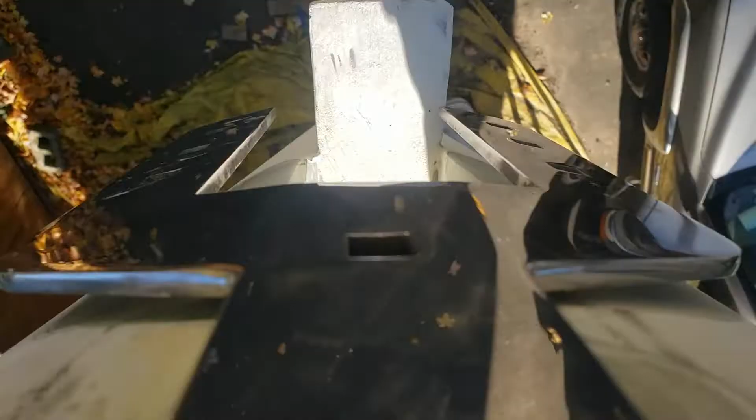This spout piece now has these walrus tusks. It's shiny because I polished it - just takes forever. I'm gonna mark these guys for drilling, then pull this out, drill them, and then we'll over-drill them so we can put some thickened epoxy in there, then prime and paint and get them all installed. That's kind of the goal for this weekend.

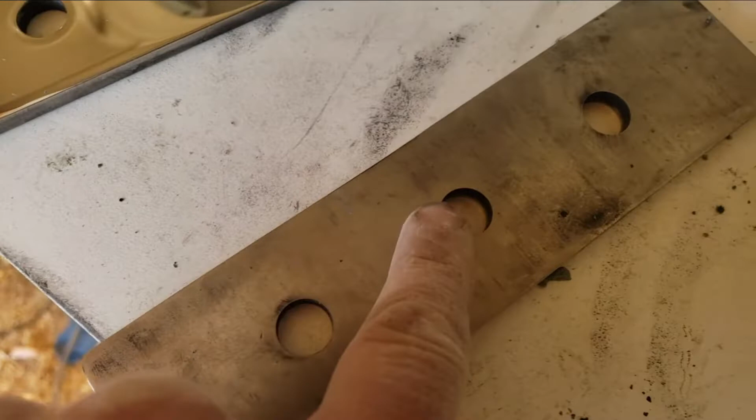Such a nice day. Okay, so after 90 minutes of polishing, I took these pieces from what looked like this, with all these lateral grooves in it, to this mirror finish.

The problem is, if you really get down in there and turn on some light, you'll see little scratches and imperfections, and one dirty, disgusting fingernail. So I'm hoping that we're really just trying to avoid pit corrosion, where salt water gets into a little groove and lives there and corrodes outwards. These are pretty darn tiny, microscopic scratches, but they still are there.

Anyway, long story short, I hope this will be adequate because I don't know how much better I can do. That was me going from like 120 grit sandpaper all the way down to 3,000 grit sandpaper, and then buffing it with a compound. I just hope they're going to hold up.

We will be installing them where it would be possible to further polish them later, so I'm not going to let that stop me from moving forward. And if I need to - you guys tell me if I need to do a better job of making that mirror finish, then I will. It might even be easier because they'll be held in place.

So it's only a half inch hole, but I'm going to drill a one inch hole, because I have a feeling that my holes, despite my best efforts, aren't going to line up perfectly. Anyway, I digress - I got a plan. All right, it's going to work. Good.

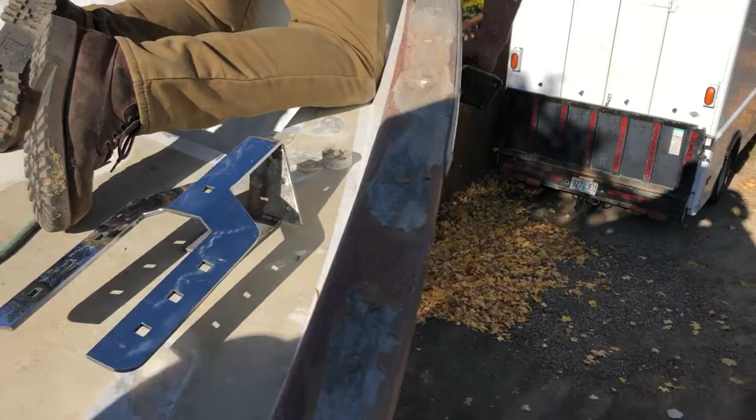I epoxied these in, and I use these crappy old bolts to kind of give me a guide for the bigger carriage bolts that will go on this piece. It looks ugly, but most of this goop is a wax that's designed to make the epoxy not stick to the stainless steel. Helps me get it off because these aren't sealed yet.

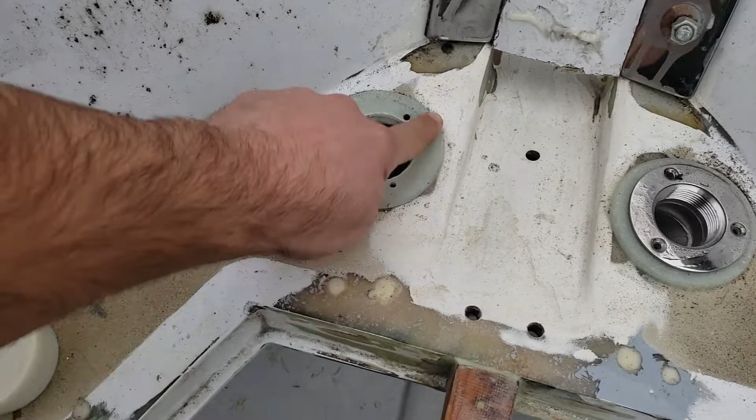They're just being glassed in. Check out these down here - these are my deck fill lines, and I put these little glassed collars around them so when they're open and being filled up, no errant water will just run into the hole, which would be bad. Gives it a little lip. Although splashing would be a bigger deal.

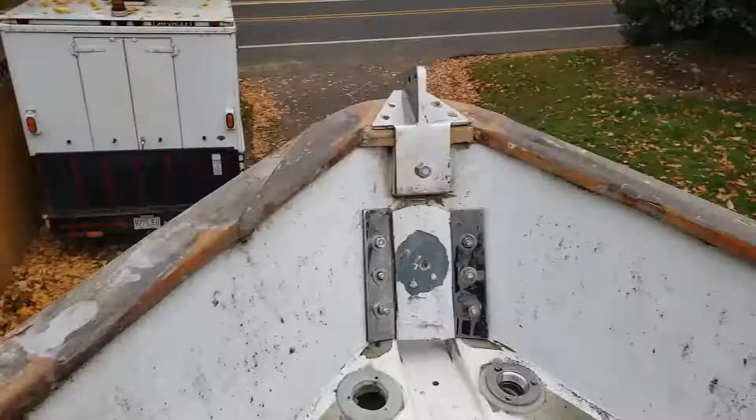These are less important because they're just for water. Obviously you don't want salt water in there, but back there, where we have the fuel fill-ups, we definitely don't want water in there. That would be bad. So I'm gonna get these off and check to see what my holes look like.

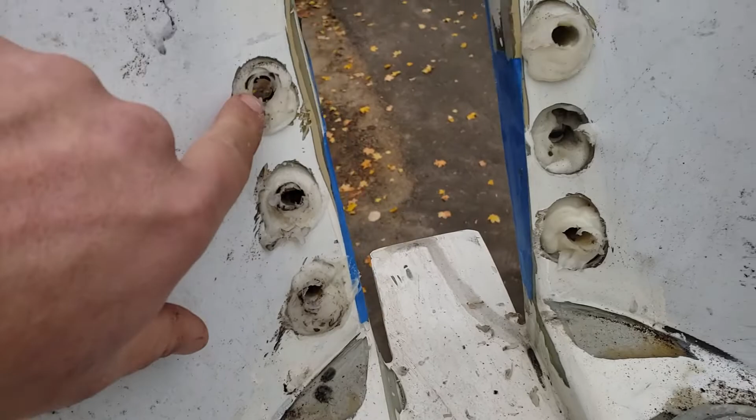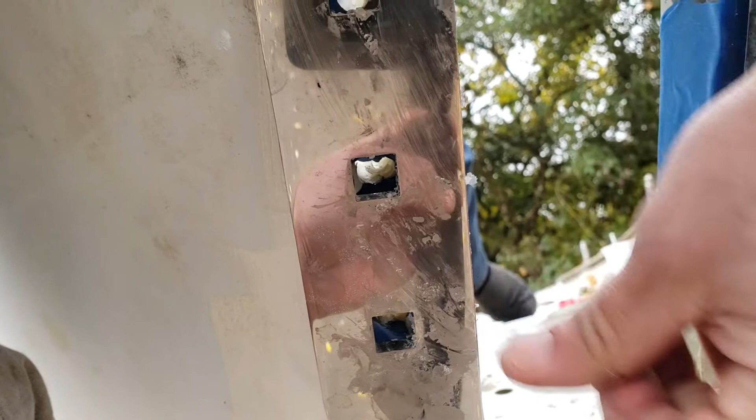All right, this might look ugly, but I'm pretty pleased because it establishes the bolt hole path through this guy. And again, all of this is wax, so any imperfection should just scrape off and then it would be gorgeous and shiny again. That's the idea anyway.

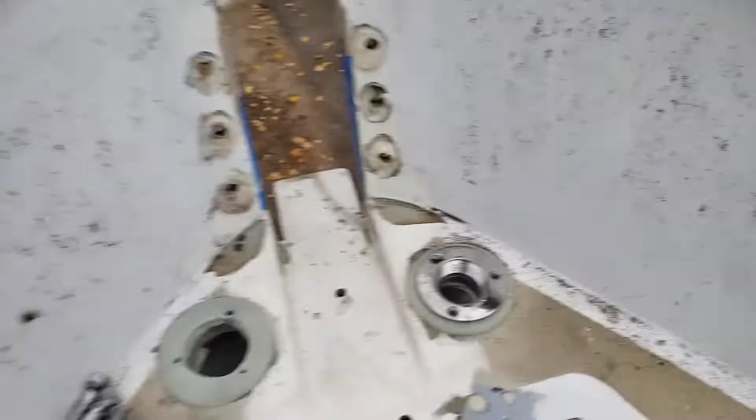So I'm gonna pull this piece off and then we'll clean this up, add a little epoxy if we need to, and yeah, it should be perfect. Let's get this guy out though. I already got this one out with my hands last night. This one's a little bit more stuck.

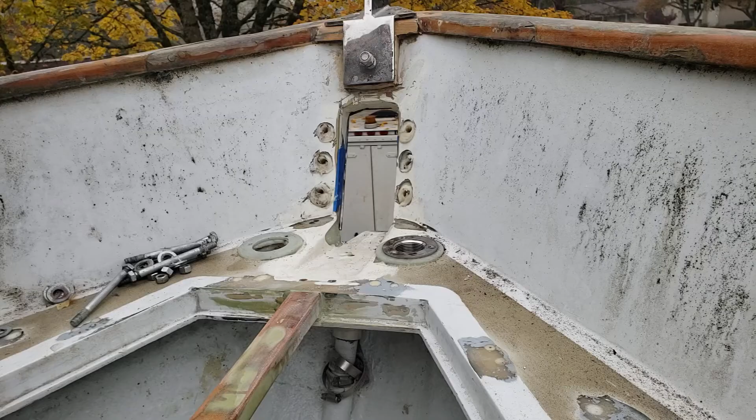Oh well, I'll do that later. Look at that, it's our boat. Yeah, that's our shell of the boat.

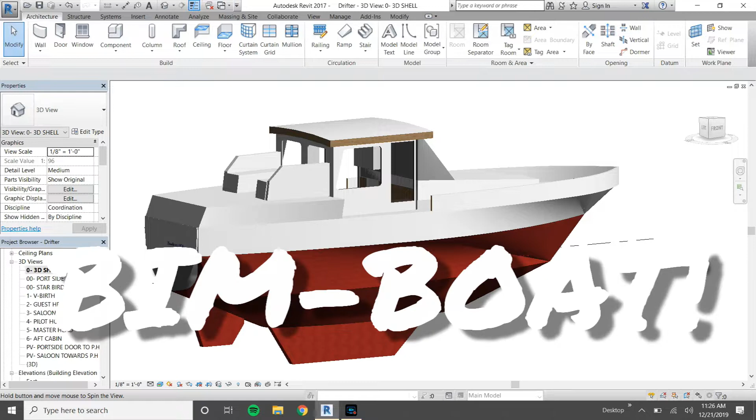Shut up, this is a 3D model I'm calling BIM boat. BIM is Building Information Modeling. So it is sort of real-time drafting. No, it's not Korean food. Okay, you build it in 3D and then you get lovely 2D drawings out of it.

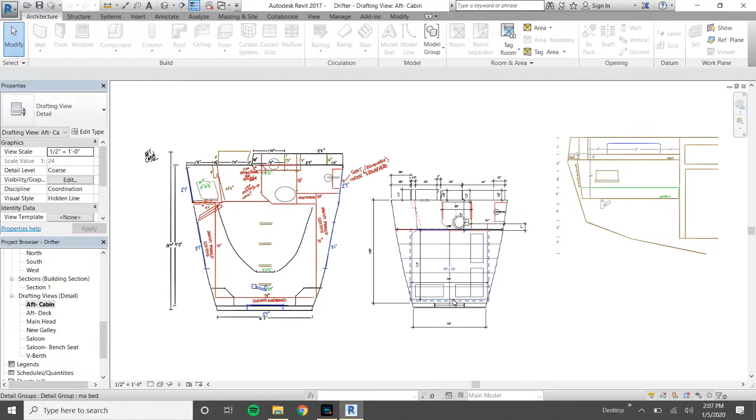Like see that cluster? Wow, it's like all the layers of the things that we've designed and then put into the boat. That is cool, what is this going to help us do? This is going to help us build it so we can get accurate information because there's so many curves and heights and weird things about this.

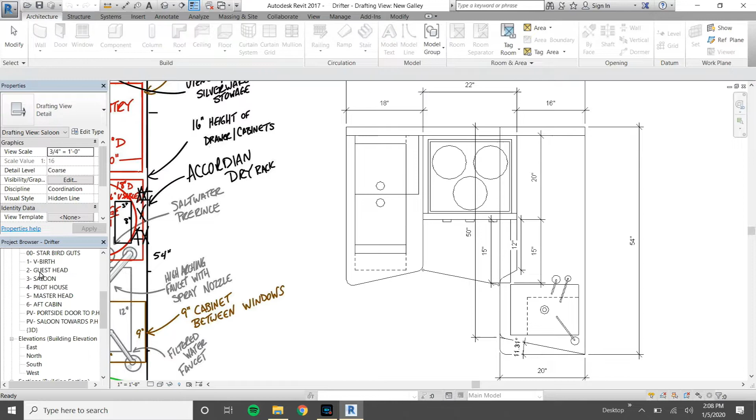So with this, can we do something and see what it's going to look like without actually doing it? Yes, show me that. That's the 3D element. Okay, so this is the shell, this is the outside. Clearly it looks just like our boat.

Let's spin it, do a little spin here. It looks squattier than it seems in real life, but no, that's about right. Yeah, see? There he is, folks.

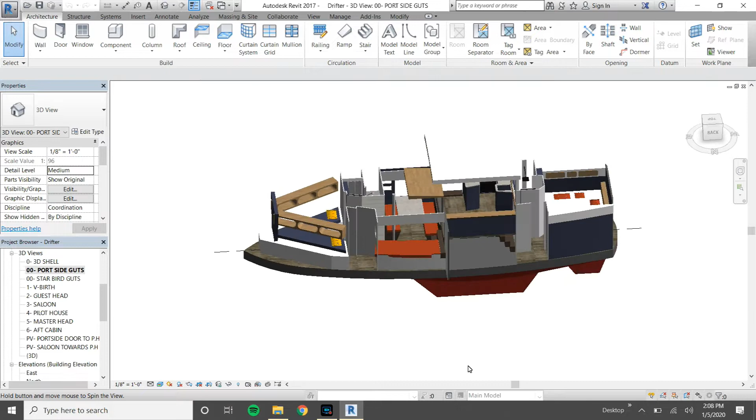So now we're going to go see the port side guts, that's what I called it. It literally says port side guts. Hold please. Oh, here's all the inner workings of the boat. So this is our plans for the boat, gives us a 3D model of what we're planning on doing.

Yeah, shall we zoom in here? I like it. Let's start at the tip and work our way back. Okay, let's start with the V-berth, shall we? The tip. Wait, so this is just the tip? Yeah, see these lovely built-ins here that you're going to be making somehow?

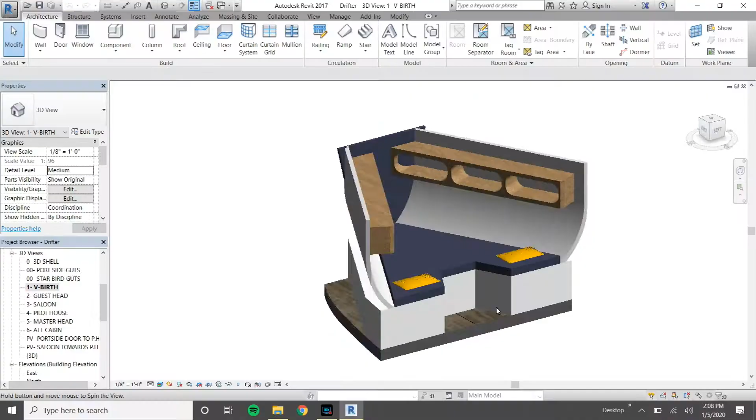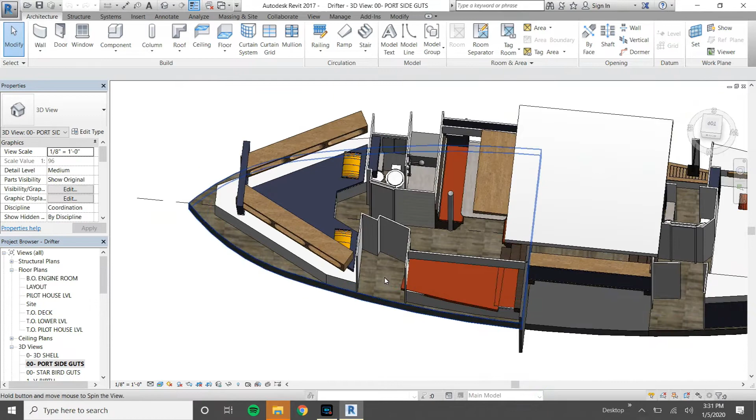I like how it's black, because that's going to be filled with poo. Yeah, gross, we literally have to carry it around with us. That's how big it is and everything. This is all fully to scale.

It is, but it's going to be leaned back and contoured to the shape of the hull, imagine, yes, there's a curvature here where it falls into. Here's our shower, yeah, it's going to be tight but functional.

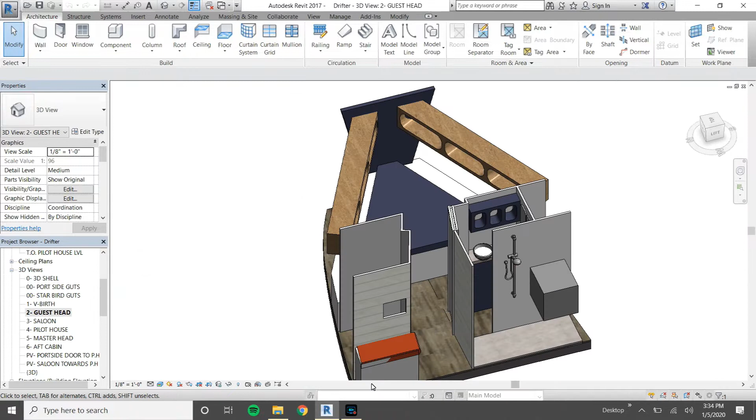I like it. Okay, this was something we struggled with on paper because it's such a shallow area for a counter, so we were thinking of doing a cool little bowl sink. Like really, all you have to do is spit your toothpaste in there and wash your hands on occasion. I think that'll be great. Yeah, we don't need it to be super deep in there.

This isn't even our crazy bathroom. It isn't? No, the other one's more crazy? Well, this one's like the best bed, spoiler alert. Okay, moving on.

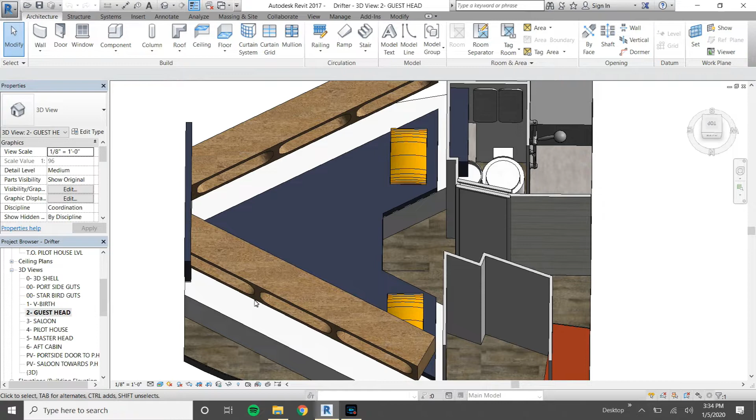We ready? Head aft. Okay, this is the saloon, this is the hangout pad area. So you can see here's where the bathroom ends, this wall here, so it's a common wall with the shower area.

Correct, we're moving the pole to where it belongs, right under where the mast lives. Yeah, right now it's about here, and now we're shifting over here.

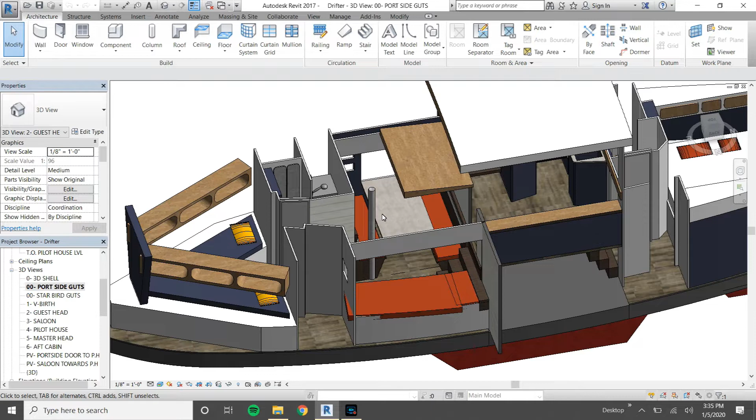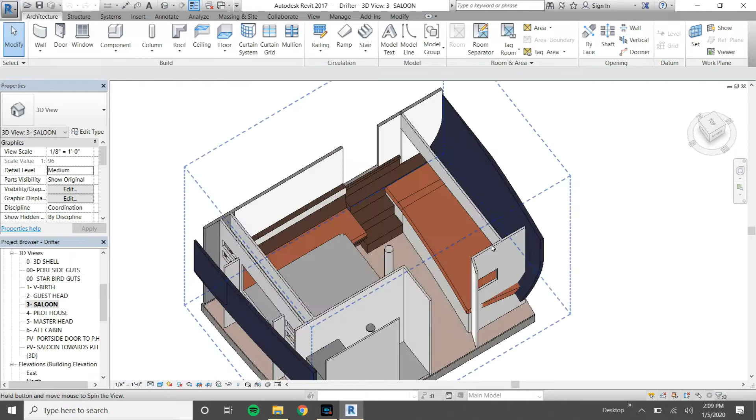I like it. We're gonna have an eating nook here and a nice settee that can double as a bed for when you're underway. This bed right here will be the longest one there is, so anyone who sails with us that's 6 foot or taller will probably want to sleep there. This table will literally fold up into this wall and can also flatten down to create a bunk in that area. It'll be quite sweet. We're really trying to focus on clever ways of cross-utilizing space, so if you guys have any ideas, let us know. That would be freaking sweet.

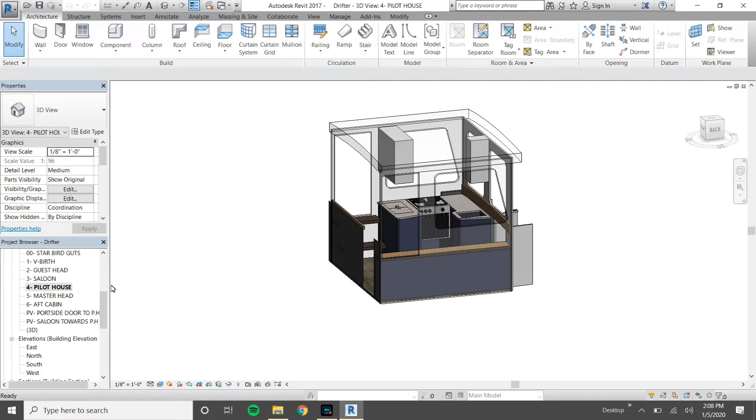Now we're up into the pilot house, which we have turned into a galley. Right now this was an old seating area, and where the settee in the saloon is, that's the existing galley. The reason we want to move it up into the pilot house is because cooking is such a huge focal point in everything, so we want it to be very comfortable for being up there.

Here's the existing galley now. We're going to turn that into a settee because we want to move the galley up to the pilot house, where it will be more convenient to the aft deck while we're sailing. We're going to put a pass-through in one of the windows so you can hand food through that or talk to people that are out there. I just think the galley is such a focal point that we want it to be the most comfortable and the easiest to utilize.

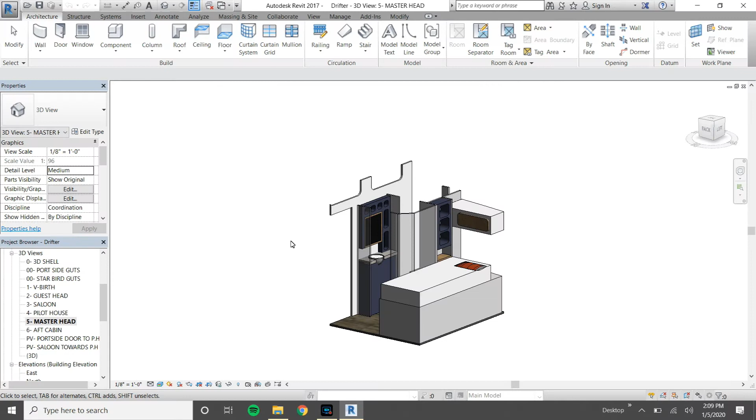Let's head aft. So this is the fancy bathroom. These are not glass walls, but just for visual appeal, so you can see through here because it's kind of a tight space. There it is, all parts.

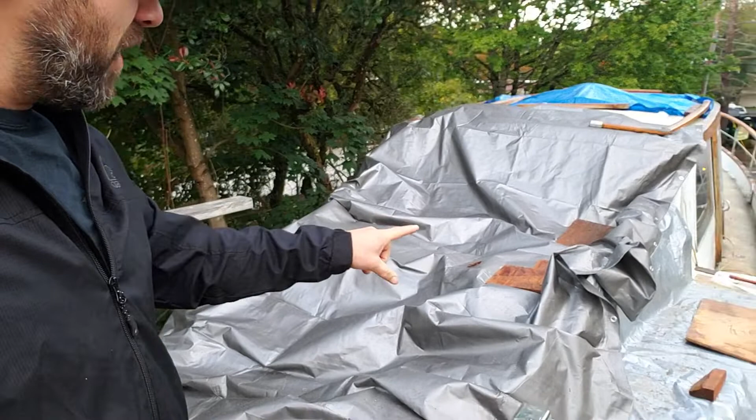This tarp is covering a massive amount of holes from when I removed all the hardware on the back of the boat. The reason I removed the hardware is because whoever installed it, the stanchions, the chain plates, all that stuff, didn't remove the core and fill it with thickened epoxy. So I was going to fix that, open up the holes, let them dry out over the next couple of days, then fill them with thickened epoxy plugs to allow any moisture that made it past the seal to go into an impermeable surface. As you can probably hear, there's a fan running down here.

Because I took off one day and it downpoured, now here in the cabin it's a little dark because of that tarp. All the windows are gray. But we've got the dehumidifier running and this heater running. I don't think this heater is meant to work this hard, but it's gonna have to, because all the wood core, when I got back, was nice and wet. Obviously we don't want to plug that in because that just seals the water inside, and that's not what I want to do. So I am slowly drying this out and checking on the progress of that today.

The mission for the week is to fill up those holes with the thickened epoxy once they're dried out, and I might have to use a hairdryer to accomplish that task, but luckily Kelly's around, so I've got one. It's basically like going back and doing something that should have been done right in the first place.

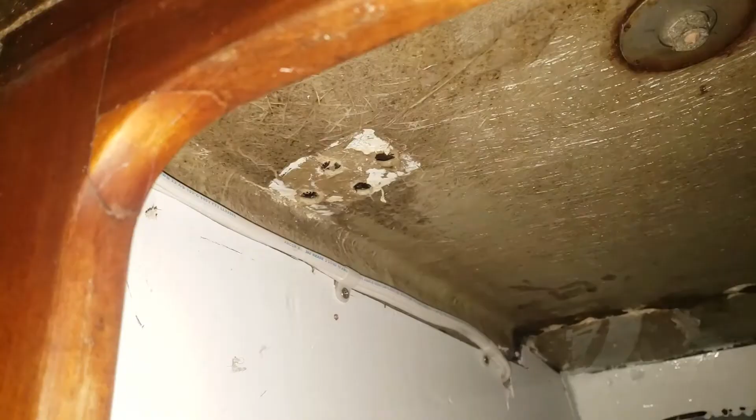Checking all the holes, they feel pretty dry, so I'm gonna err on the side of caution and let that go for the next 24 hours, and then we'll tackle plugging those holes.

I guess I better go do some work, like for my real job.